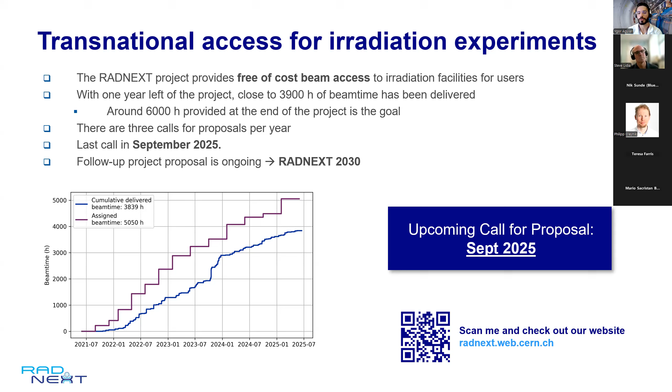Looking beyond 2026, after the end of the project, we are already planning a follow-up initiative, RADNEXT 2030, which will continue to support the advancement of radiation testing technologies and also open up new opportunities for researchers worldwide. So we are very excited to see how RADNEXT will evolve and continue to contribute to this scientific community in the coming years.

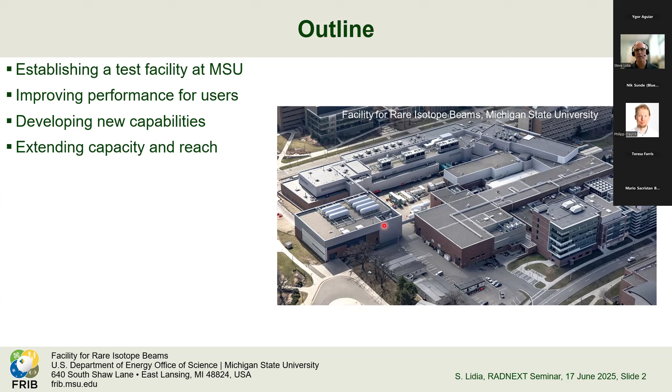Experimental beam lines are shown here, kind of in the middle between the office and the linac driver. And then on the other side is our cryo module assembly building, where we now have an additional world-class facility for assembling cryo modules, testing cavities, and developing the infrastructure we need for the linac.

In terms of a brief history, prior to the installation and implementation of a linac-based driver for nuclear physics, we were a coupled cyclotron facility, and before that, a single cyclotron facility. The last incarnation of our nuclear physics program used a tandem K500 cyclotron driven by an ECR source as an injector to a K1200 cyclotron to generate ions up to about 200 MeV per nucleon.

These ions would go to a target system and a fragment separator, and then onto experiments. For SEE testing, we had a beamline, or a portion of a beamline, where a small test stand was developed, which has a PPAC detector for essentially intensity, beam distribution, and rate, plus a translation stage for mounting boards or other DUTs - a fairly rudimentary but workable system.

This was circa 2004, about 21 years ago. We delivered a handful of beams, looks like 4 beams or so, in energy ranges up to almost 150 MeV per U. This was lightly used, I'll put it that way.

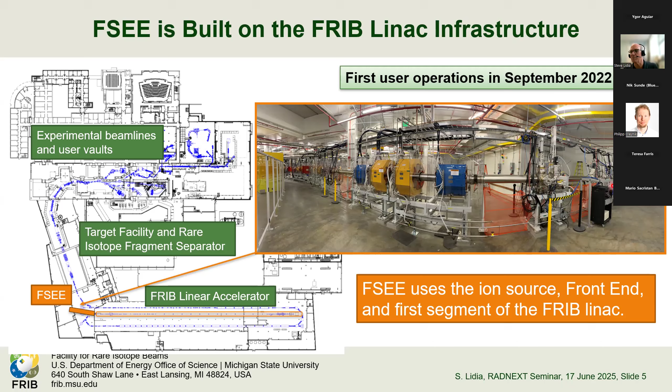Based on the requirements from the community, these are the parameters we were required to produce, both at thresholds as well as aspirational values. The LET in silicon that we provide is less than 1 and greater than 80, so 0.7 to 82 is appropriate for the ion species we're using. Fluxes of basically 0 to about 10 to the 6 ions per square centimeter per second, with kinetic energies up to about 44 or low 40s MeV per nucleon.

That would be for our oxygen beams. Our heavier beams are more in the 15 to 25 MeV per nucleon range. The beam diameter is only up to about 2.5 centimeters, so it's a decent format - a size of the beam that will cover most components on an electronics board, but it won't cover the entire board.

So there's a development plan to increase the beam size delivered to the boards up to around 50 centimeters. That's a very large beam for us.

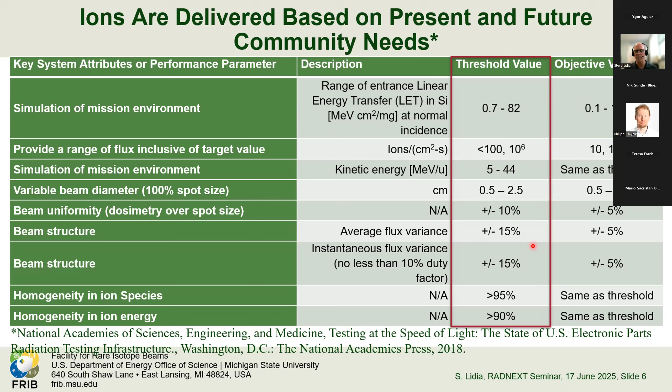And then there are other parameters in terms of beam uniformity, energy purity, species purity, as well as the time structure allowable on the flux that we deliver, and all of these have been delivered at the end of the project.

The quad-octupole transformation requires that we degrade the beam quality a little bit. We pass it through a scattering foil, which increases the emittance somewhat so it can go through this transform and create a much more uniform beam. That adds a little bit of energy degradation, which is then accounted for in our dosimetry and final energy delivery. A couple of Faraday cups are included for making intensity measurements.

This first Faraday cup is a beam stop, and that was initially used as our beam shutter by the user - they would insert and retract a Faraday cup essentially for starting and stopping the beam. We've since moved on from that, but that was the initial implementation.

There's the final window cross here on the vacuum chamber, which has a window, vacuum gauges, and a fast connect, and a connection to a fast acting gate valve, shown right here. Haven't had an incident yet, but it's built in.

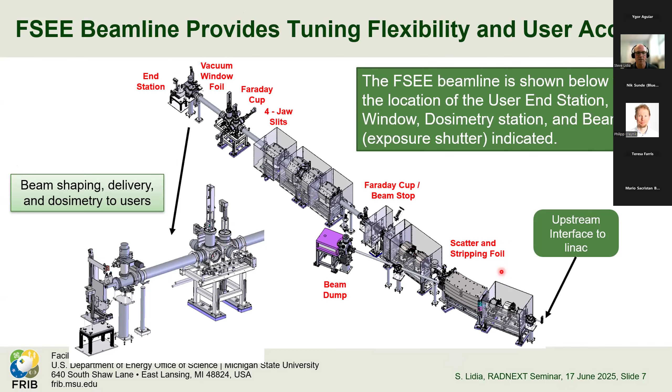We also have the entire linac, of course, with all of its diagnostics, as well as the front end, which provides us additional information needed to generate the dosimetry information for users.

The end station again looks like this. The window, or nozzle, the hole where the ions come out, is for our users. A set of targeting lasers for alignment purposes, and then we have a number of cameras mounted around for monitoring the position and overlap of the lasers with the DUTs during testing.

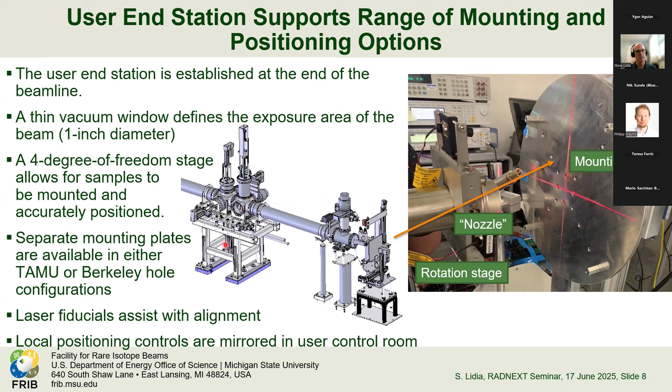Here in North America and the United States, there are several long existing test facilities: Texas A&M with its K500 cyclotron-based system, as well as Berkeley Labs with its 88-inch cyclotron. Those are well-established and well-used facilities, so not wanting to reinvent the wheel, we've used essentially the same type of mounting plates, trying to make the interface for users as seamless between the different facilities as possible. So we've used similar designs.

One of the things we had to do, however, was look for a new vacuum window material. Existing facilities, or at least Texas A&M, in the low energy regime for heavy ions, where you're really concerned about the energy loss of especially the heavier ions going through the window, need thin materials. They were using Aramica foils. There's also Havar, a non-magnetic alloy. However, Aramica seems to be the preferred type of window material, but it's no longer available on the market.

Texas A&M, I believe, has got a nice stack, and I didn't want to necessarily dip into their stack by asking. So we developed a new window material. Well, we didn't develop the material, but we adopted polyethylene naphthalate, PEN, which is a kind of a higher temperature type of polymer, resin-like material.

We initially metallized both sides. Here's the air side as well as the window side, or the vacuum side, where we put a small amount of metallization. The intent there was an initial try at developing essentially a diagnostic, just to try to read back the charge that was exiting the window as a means of adding additional diagnostics for dosimetry.

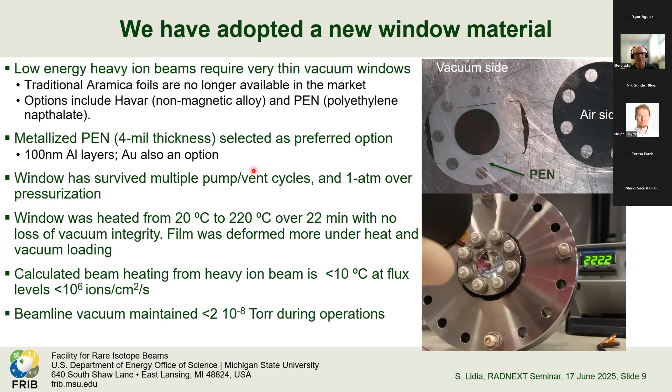That's one issue we have to deal with, getting access, and we try to make that as efficient as possible. However, there's also a long cable length, on the order of several hundred feet. So if the users want to run their own cables, we do have a designated cable tray for it, but it's a long cable length. We provided, shown here as a patch panel underneath these monitors, connections for Ethernet cables, as well as some analog cables, coax, and some multi-pin cables if they want to use those.

We haven't had great luck getting low-level analog signals from device testing up over those analog cables, but users with this energy scale facility, where we're not creating a lot of background radiation, can site their instrumentation right next to the beamline, right next to the devices, and then utilize these Ethernet cables to talk to their instrumentation, and then using keyboard, mouse, video links, shown here, we can pipe those into these monitors, or they can use laptops or other interfaces.

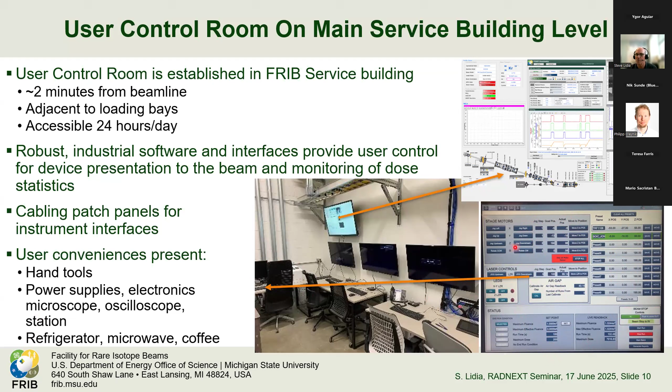We've developed that in-house. And so there is one of these panel view touchscreen interfaces in the control room, and another one resides next to the beamline, so that the users can move the stage around. They can generate preset values for stage positions. They can control the lasers. They can calibrate the air gap with a Z laser. And then they can start and stop the runs as necessary, and then generate reports all through the touchscreen panel.

Our initial complement of beams are shown here. So again, this provided us a set of LETs from less than 1 up to over 80. So oxygen through bismuth are the beams that we provide, with these types of fluxes. The maximum flux for the light ions is about 10 to the 7 particles per second per square centimeter. For the heavier ions, it gets down to about 2 to the 5.

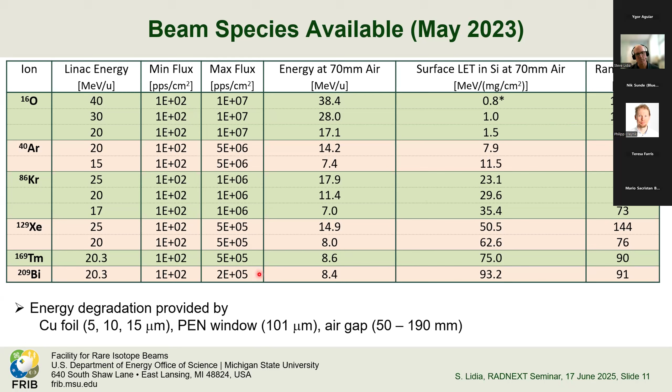And that's just due to essentially overly conservative estimates for heating on the window. So these average flux numbers are based on some calculations that we did on background heating of that window material, assuming a temperature rise of something on the order of about 25 or 30 degrees Celsius maximum. We found kind of empirically that we can relax that a bit. I think our safety margins were more than a factor of 10, so we are able to relax that a bit. But those are also relatively reasonable values for our users to use for fluxes.

So as I was mentioning, some of our instrumentation. There's those four-jaw collimators that we use for the final beam shaping and collimation. They're actually isolated, and we read those back onto sensitive picoammeters and cross calibrate those against Faraday cups to the beam flux. This is our way of monitoring in real time what the delivered beam flux is. A Faraday cup and viewer are also used for tuning the beam spot prior to delivery. Scintillator, infrared camera, silicon detector, et cetera, in air for final beam delivery.

So we use these plus the upstream beam position monitors in the linac for time of flight measurements. We have a number of diagnostic elements next to the ion sources at the other end of the linac system, which are used for performing our charge state distributions, so that we know which mass and charge state we're sending down the line. So we utilize this whole suite of instrumentation to verify our flux, our energy spread, beam purity, the beam energy, as well as the beam flux and intensity.

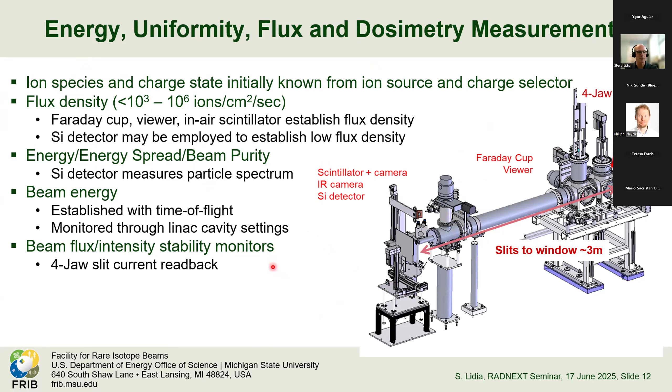So as you might recall, this quad octopole beam transformer does an interesting thing with nonlinear optics. If tuned correctly, it takes a Gaussian beam in both horizontal and vertical dimensions, expands it, moves intensity out to the sides, and can generate a relatively flat profile in the center with these large amplitude ears at the end. You can see the ears here in the vertical plane in this image. This is the track simulation, not actual data, but the real data looks similar. But this is how we do the tuning.

So we will now use those collimators to block various portions of the beam. By doing that, we've now generated essentially a square uniform distribution beam profile that is then used to irradiate and expose the boards and the elements and the components.

However, as you can see here, these slits capture about 90 to 95% of the total beam intensity. So not wanting to throw away that opportunity, we've connected those to CAEN ELS. They make this nice set of instruments that we use fairly ubiquitously through the entire linac, picoammeters and these TetrAMMs. It's a 4-channel picoammeter that gets us down into the pico or femtoamp regime for measurements. We use these instruments for measuring the charge collected on the slits themselves as our background monitor for beam intensity.

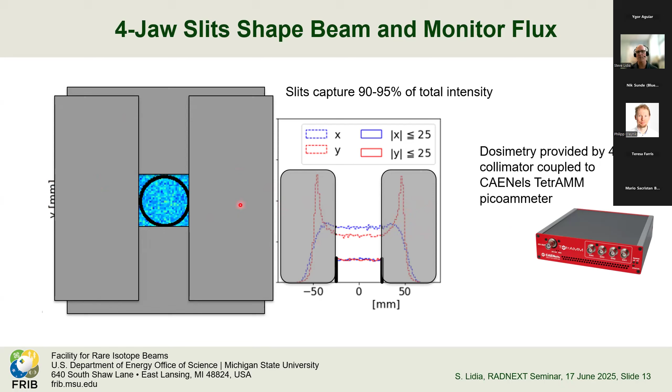The dosimetry then looks similar to this during a set of exposures. This is a little bit of synthetic data, but you get the picture. The flux in real time is shown here on the red curve. This is a time scale of about 20 minutes, and so each of these runs is about 100 seconds. A cross calibration of the four-jaw against the Faraday cup is shown here, and then the integrated fluence starts from 0 and goes to whatever maximum.

This is the type of process data that the users can see. So they can see in real time if there's any drift, any burps, any interruptions in the delivery of beam flux. And then all of this information at the end of a run is captured in a run report. This is interesting because this run report was our first example of a run report for the users, and it captures essentially all of the flux and the delivery information.

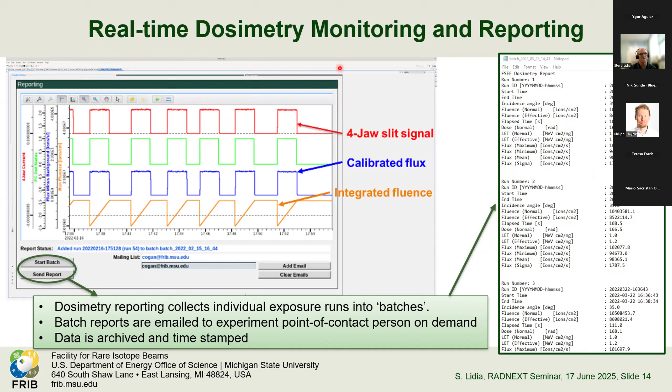We've since expanded this with many other parameters that are delivered to the users. It's about twice or three times as long as this now, and some of that is based on our pulse beam delivery. But this has been delivered on demand by the users when they press send the run report. We send a batch of all of the runs collected to that point in a text file, as well as a MATLAB file, which incorporates some of the waveform information, in particular the run by run flux versus time. And so they have that for further analysis of the performance and behavior of their parts.

And once we started seeing this, Greg Allen's nice quote was, "You're in the family." So that was a nice bit of acceptance from a couple of testing teams. Now this was just a few little spot tests, but that verified the operation of the facility as well as the dosimetry that we're providing. Okay, so that got us going. And that's about 3 years ago now.

So we started now with a list of users. We had one company, Texas Instruments, work with us very extensively, trying to help us develop the facility, our capabilities, our user interfaces, and make things much more convenient for the users. Once we started, they came and developed a long list of needed improvements, to make things more efficient on their end, to add capabilities and fill in some holes as they would see it.

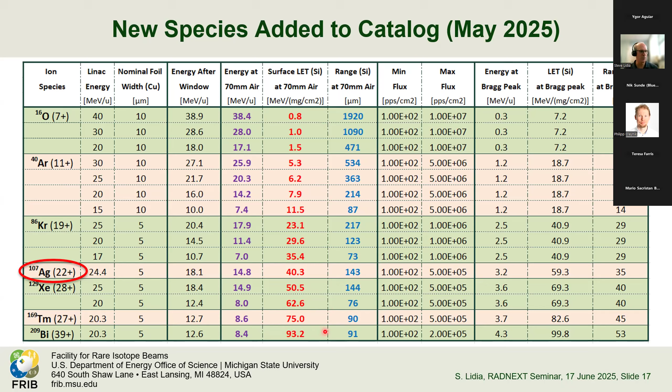All right, other functional improvements. So we didn't initially have this, what we're calling a laser ruler, or it's a vertically oriented visible laser system that you can use to calibrate the position of a part, or basically a DUT under test from the window. So you calibrate the air gap.

You know, different parts, different boards, they have different locations in space, and so we have to be able to calibrate that. And so one of the first things was implementing that quote unquote laser ruler, and then having essentially a graphical feedback system so the users can tune somewhat in real time. And I'll talk about that in a minute.

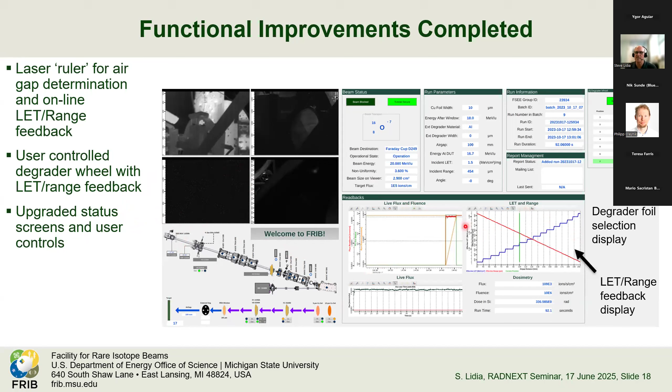Also a degrader wheel. So we didn't have any other degraders initially. We had a cap that you could attach to the exit window, and stick some shimming material in there for different degraders. But you can only do that one at a time, and then have to go down and change it. And so we implemented a wheel, and then updated the user interface and the status screens to provide a lot more information at the right times for them.

So the degrader wheel is shown here. This was essentially an optical filter wheel. Very easy implementation. We were just able to buy that online. We are also then able to incorporate the controls within our EPICS system, so our main control system. So it's integrated seamlessly with the accelerator and the beamline and the user controls. And then also integrated into our dosimetry system.

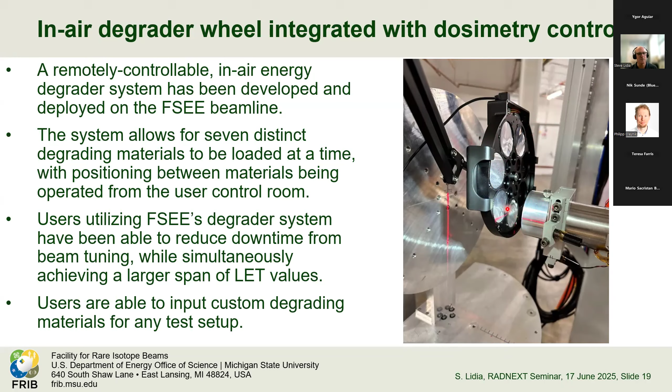So the users can make the wheel turn, put in different thicknesses of materials or no material whatsoever, and the dosimetry, the LET and range automatically update based on all available information of the beam type and energies, for instance. We developed a large database.

So this was looking now at our set of ions with their particular energies that we deliver. So using a finite number of ion and linac tunes, and then incorporating different degrading materials, those scattering foils I mentioned earlier, different positions of the degraders, and then assuming initially that the beams were going to be impingent upon silicon as our base material.

We've since updated that. We developed a database which captures different air drift lengths, all of the different finite material parameters, and then different depths in the silicon. And developed an energy and a range and an energy deposition type of profile in this database.

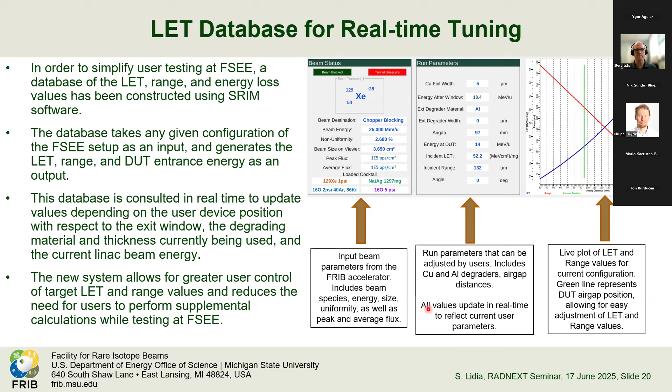Okay, so I mentioned that the test facility is located in the linac tunnel, and that means that the users are in the same space. There's no other additional shielding between them and the linac cavities, the linac cryomodules. So we have to make that area safe for the users to enter and to access.

There were two ways that we considered. One was incorporating active monitoring with X-ray monitors, maybe at various places and definitely around where the users would be working, such that if they detected a cavity breakdown event, they would cut the power to that cavity precipitously. We decided not to go that route.

The route we decided to go, which was we removed the risk altogether, is just to lower the cavity amplitudes, lower the voltages in all of the cavities, in this case the first linac segment only, but lower all of those amplitudes to zero and remove any type of X-ray generation mechanism. Allow the users to access the beamline, make any changes to their parts or their instrumentation, and then exit. And then once they've exited the area, then we have permission to turn the cavities back on. And so that's what we do.

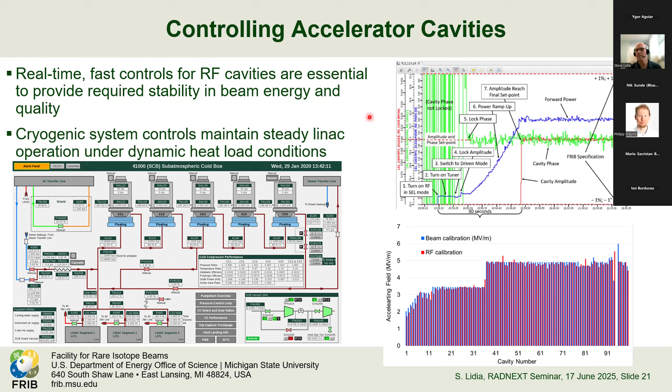Now, initially, an SRF cavity, as you might imagine, doesn't like to be turned on and off very frequently. It doesn't like change. It likes to just hit its value, hit its amplitude, hit its phase, and stay there. And so this is a somewhat unnatural position for the cavities to be in. But we developed a set of excitation and tuning, kind of shown here, where we start from essentially a self-excited mode, and then quickly go into an driven mode. That was our initial process.

Our last iteration is we bypass the self-excited mode altogether, and we basically move the pneumatic tuners for the cavities to their nominal final amplitude position as we turn the cavities on. And so it's a controlled process. It's a well-studied process at this point, and that allows us to get back to our nominal voltages in those cavities within about 2 minutes, and sometimes a little bit faster. So we can turn the entire linac back on within about 2 minutes. And at the same time, we can take it down a little bit faster than that. So all of the cavities can be turned on and off in about 2 minutes.

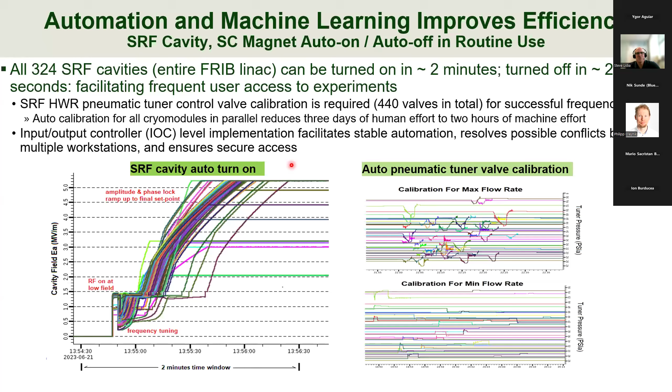And so that allows us to introduce some efficiency back into the process for the users. They don't lose that much time. And honestly, that 2 minutes is about the amount of time it takes them to walk from the control room down to the entrance of the linac. So no time is necessarily wasted.

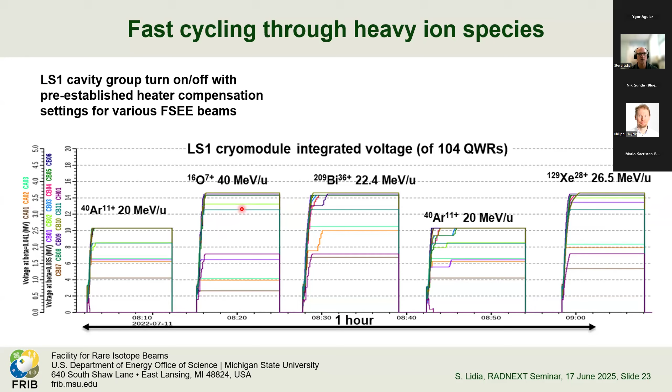Other improvements that we've been making are on those windows. So as I may have mentioned, the thickness of the windows that we use, these polyethylene naphthalate windows, the thickness that we started with was 100 microns, which for the heavier elements is a significant amount of energy loss going through the window. And we also started with a relatively small window, only 1 inch or about 25 millimeters in diameter.

And so we've made a couple of improvements now. We've gone from a 100 to a 76 micron thickness. The 76 was not available to us earlier, but it is now, and it's been tested and vetted. So it's a material thickness that we can use in this application. And we've also gone from a 1 inch to a 2 inch diameter.

So for our next iteration of our window, it'll be slightly thinner, so we can reach some higher energies with the heavier ions, and a larger size, so we can at least start to grow the amount of area on a part that we can irradiate.

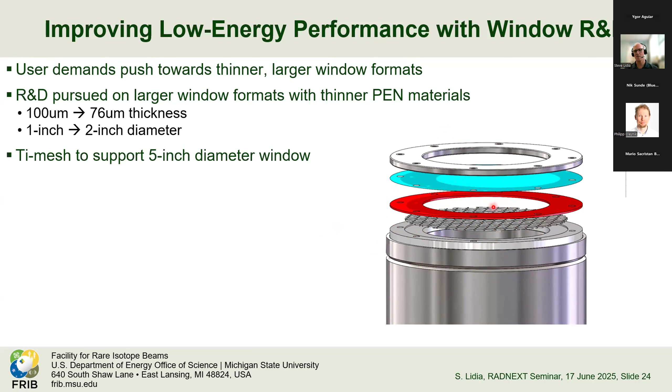There is, of course, going to be some interception of beam. There's going to be some scattering, some energy losses, and so that still needs to be quantified. But within the range of LET measurements and FSEE type of measurements, it should be a small effect.

Okay. We have incorporated machine learning, essentially as a background R&D project for operating the SRF linac in general, and how quickly we can tune, which has benefits both for the nuclear physics program as well as for the radiation effects program. We've concentrated on models using Bayesian optimization as well as neural networks, and their combination to allow us to quickly tune the transport through the linac for these beams, so that we can tune the transport and the emittance within just a few minutes.

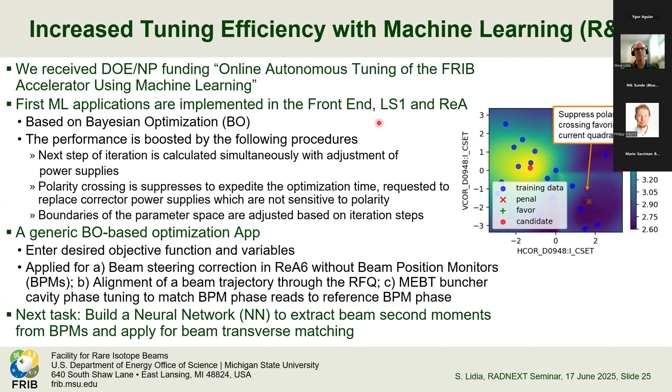And so that greatly aids retuning the linac in case a cavity goes down or we have to retune around something. We also use these techniques now, neural network systems in particular, to help us look at the quadrupole term. That seems to be a pretty popular subject these days. So we use data from 4-button BPM measurements to help reconstruct, with these appropriate models and training of the agent, the quadrupole moment of the beam, and again that then feeds back into beam transport tuning and quickly retuning the linac.

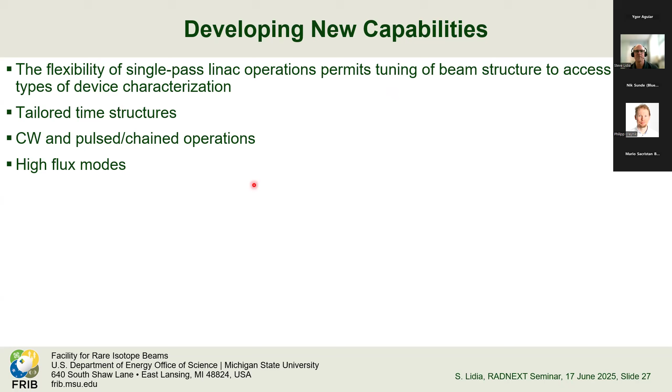In terms of new capabilities that we are developing, we're capitalizing on using a linac-based system, which can generate some tailored time structures as well as continuous and pulsed operations, and we're exploring these high flux modes. So let me talk about that for a few minutes. The RF nature of the linac generates a series of these pulses. We have a 40.25 megahertz RF system for the beam. So the beam then appears as these peaks every 25 nanoseconds, and that's our microstructure. That's just a basic part of an RF linac.

We incorporated an electrostatic chopper in the front end near the ion source, which operates at a 100 hertz repetition rate, or essentially a 10 millisecond cycle. We have to incorporate a small gap in there for diagnostics, but then we have freedom to control the rest of the 10 milliseconds. Normally, we provide all of this beam, essentially all 10 milliseconds. So we provide a continuous beam to the users.

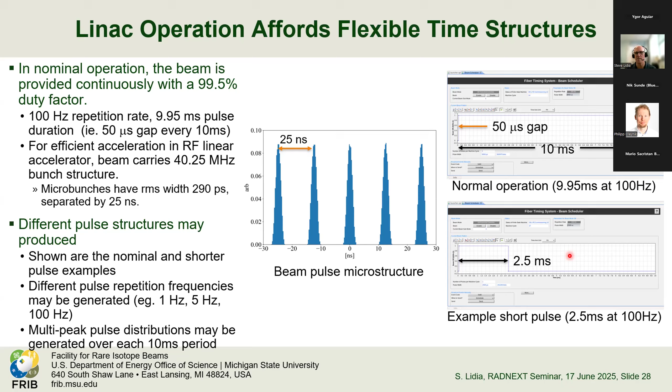But we can change that. We can go to smaller duty cycles, smaller pulse durations, all the way down to about a microsecond pulse duration. We can do single pulses or up to 100 hertz. And so that then allows us to explore different ways of delivering beams to users who may have slightly different needs.

The whole front end system gets in on this. The ion sources are shown here. We use these dipoles and slits as our mass to charge filter. An electrostatic chopper is here in the front end, which now defines the duty factor, the rep rate as well as the pulse duration for the beams as they are then injected into the accelerator and delivered to the experiment.

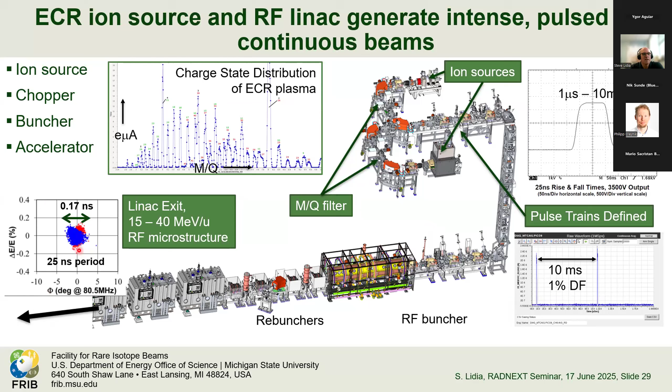So we can now use the concept of a chopped pulse, going from a CW, continuous pulse every 10 milliseconds to something much shorter, as a way of fine-tuning the flux that we deliver. So it's a very fast, very accurate way of making large or fine scale adjustments to the average flux that we deliver. Of course, the peak flux is always the same.

And so it really depends if the user's device can withstand these short, high fluxes. But if they can, this provides a valuable knob and a very quick and easy way of tuning the flux to what the users may need. And we can do that now over 6 orders of magnitude pretty much instantaneously.

Other capabilities with pulsed beams now. I mentioned the average flux that we can deliver for any ion species, but that's the average flux. We can go to much higher fluxes over shorter amounts of time using this kind of pulse mode delivery, and generate instantaneous fluxes up to 10 to the 12 ions per square centimeter per second in a focused beam, rather than a uniform beam. For uniform beams, we can generate fluxes up to about 10 to the 10 ions per square centimeter per second, with appropriate duty factor limitations on the delivery so that we don't exceed that average flux or the average power onto the window.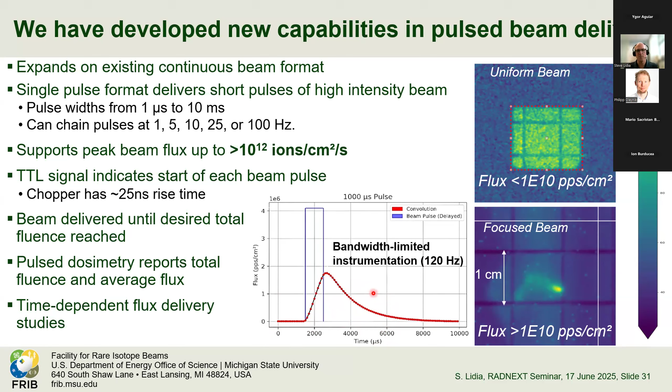So we now can do this. We can deliver a single pulse. We can deliver 10 pulses or 100 pulses, or however many pulses the user might want in a particular chain of pulses. The pulse to pulse intensity or amplitude spread is very small. So now we can use this to generate different types of time structures as a user may want or be interested in for their types of devices.

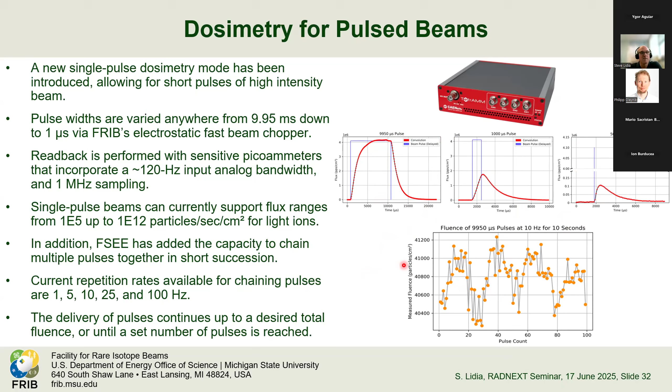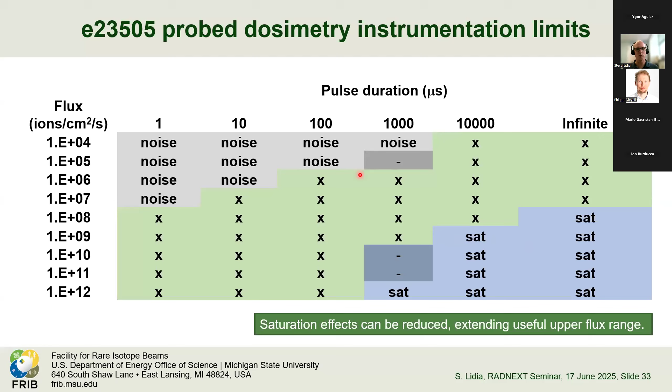This is just showing an experiment we ran into - basically at short pulses, at small fluxes, we get into instrumentation noise effects. At longer pulses, at higher fluxes, we get into saturation effects on the instruments. These are all understood, and we're pushing back on the saturation side now, and the noise side will incorporate additional mitigations.

The last thing I want to mention is we've had some users who are interested in neutron effects, and barring a high flux or the ability to look at a high flux or a pulsed high flux neutron source, there was some interest in looking at some correlation studies for utilizing heavy ion beams with the appropriate LET, the appropriate energy and mass, which can simulate in kind of an analog beam sense the interaction of neutrons with, say, silicon - the generation of recoil products, which then deposit energy into the electronics itself.

This was an interesting set of tests that we did with some folks from Sandia National Laboratories, where we used a 40 argon beam to simulate a 14 MeV neutron. So this is kind of an interesting way of utilizing heavy ions as a substitute for neutrons to essentially put brackets or limits, upper or lower limits, on the cross section on the effects that the electronics might see.

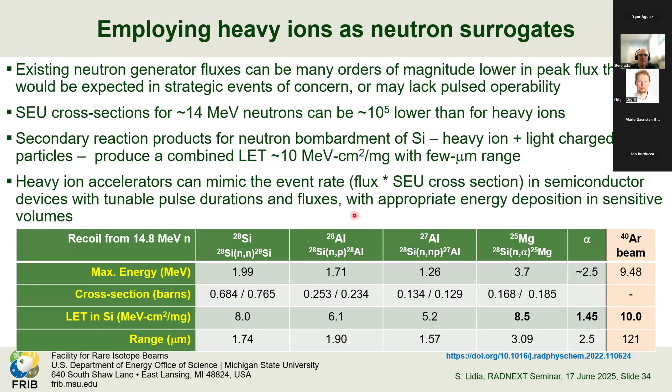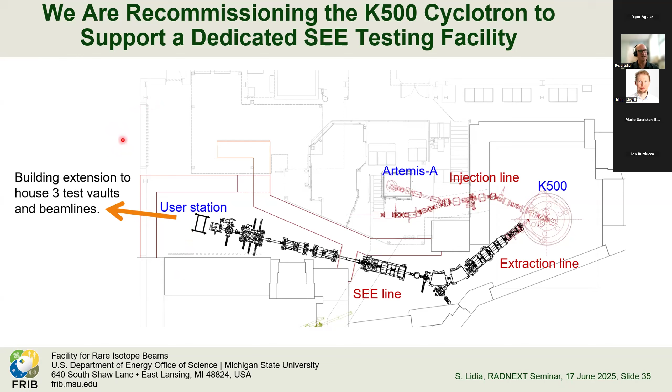So finally, in terms of where we're going now - I mentioned that we started with a K500 driving a K1200 cyclotron. The K500 is still there. We are now developing a standalone SEE beamline based on a K500 cyclotron, plus a delivery beamline and a user vault and user station. This has now been built. We are now commissioning it. And we are also building an extension to this building to host an additional 3 test vaults, or to bring us up to a total of 3 test vaults.

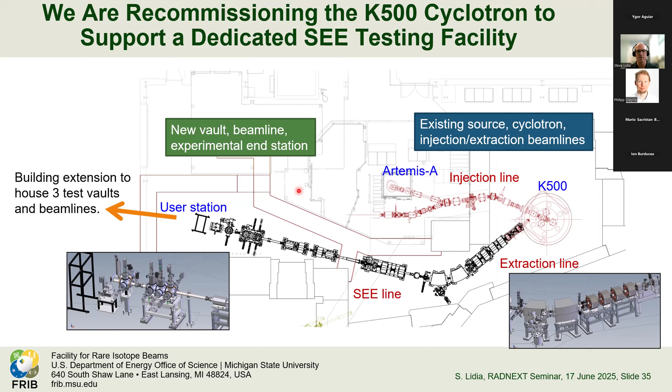Again, showing a similar type of beamline structure that you might expect. So we're expecting first operation in July - we're almost ready for users to come and visit the station. And again, it'll be dedicated, so we don't share the linac with the nuclear physics program like we do with the FSEE beamline. And then finally, we're working on some higher energy beam capabilities.

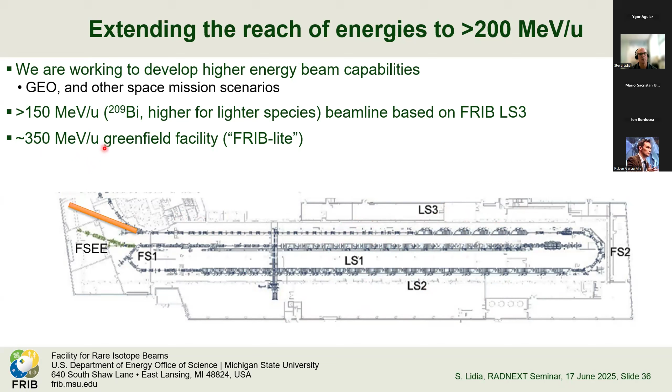First one is just developing another beamline, but attached to the high energy linac side in the same tunnel. That'll get us to energies above 150 MeV per nucleon for our bismuth, and then of course higher for the lighter species. And we're also developing plans and talking with various funding agencies to develop essentially a light version, or a reduced scope version, of the entire FRIB linac as a greenfield facility to get us into the 350 MeV per U regime, again for the heavier ions.

So those are our projects - that's our work right now. We're entering into our 3rd year of operation on the linac-based facility, where we're providing up to 2,000 hours per year that we share with the nuclear physics program. We're beginning our user operations for the K500 facility next month. And we have these projects for higher energy beam delivery that we're pursuing. So thank you all for your attention, and I'm here for any questions.